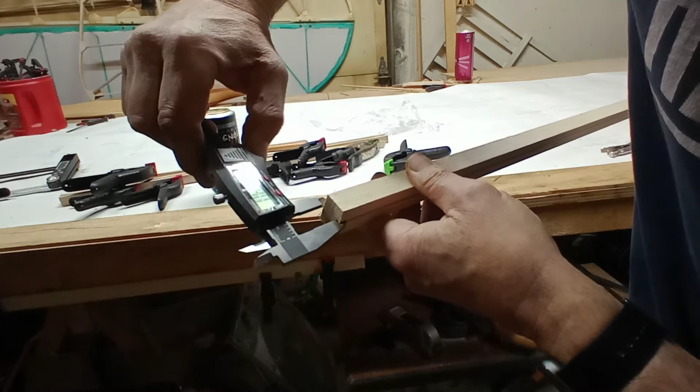And this is what we're concerned with right here, because now we've got to cut the web that fits between the two spars. So 565 thousandths, and we know it's going to be pretty much the same the full length, but we will go to the far end and check the same. So at the far end it's 552 thousandths, so just over 10 thousandths difference.

So we're going to go with the thickest, 565 thousandths, and I've got these up in the rafters, so I'm going to go up and measure a few more of them and make sure that the thickness between the bottom of the slot and the top of it is relatively the same. And I'm going to take the highest number I find, double it, and subtract it.

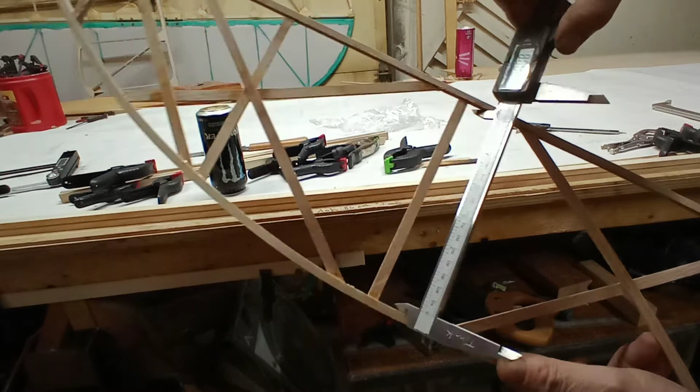So you have to measure the width of the rib right behind the main guide there for the main spar, 683 thousandths, and I've averaged it out to about 678, about 680. No, what was it? I don't know. But I'll measure a bunch of these, and I'll get the smallest one, and then from the distance I get across here on the smallest one, I will subtract 2 times this width, and that's how wide the web needs to be.

So after checking this selection of ribs, they vary between 6 inches 780 thousandths, right across here where the spar fits, and 6 inches 800 thousandths. So they only vary about 20 thousandths of an inch. So that's pretty good.

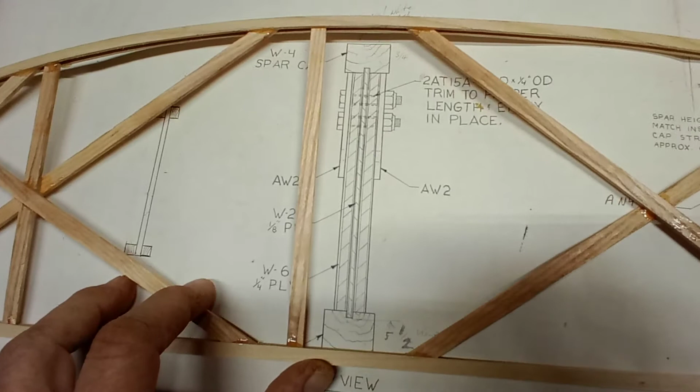Now, this here is a better way to show the example of how you're going to cut that web. That web needs to fit right there. See that? That's where the spar fits right in there, and it'll butt up against that riser right there. So you need to subtract this distance and this distance to get how wide your web's going to be.

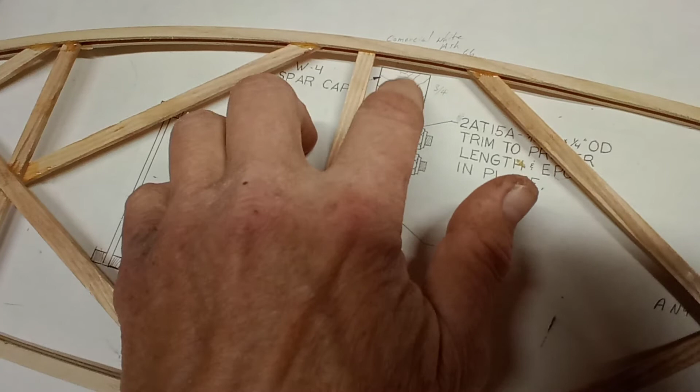And we know the distance of this, well, I'll have to remeasure it. I can't remember what I said it was. So you subtract that twice, for that side and this side, from this distance between there. And that's how wide you make the 1/8 inch plywood web.